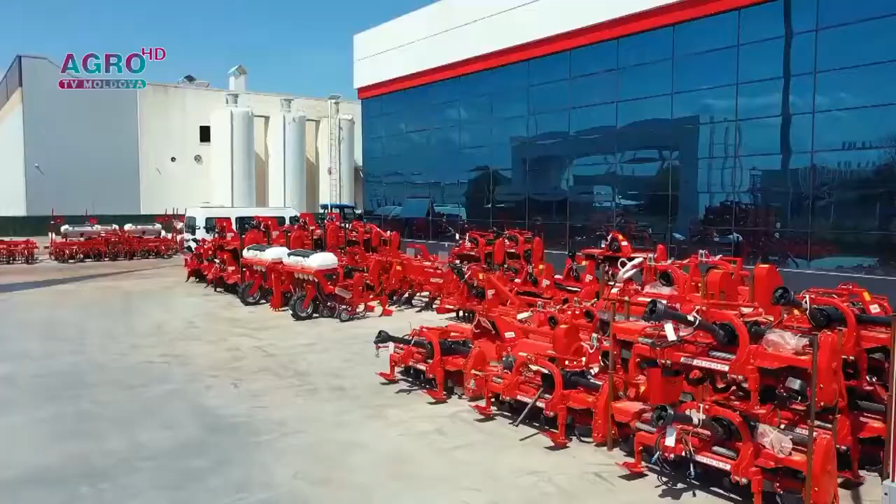Din 1995, Toscano din Turcia produce echipamente agricole avansate pentru prelucrarea solului, mărunțit, însămânțat și plivit. De la bun început, scopul de bază al brandului a fost acela de a oferi acces fermierilor la mașini agricole performante și moderne și de a-i determina să nu mai folosească utilajele tradiționale cu eficiență redusă.

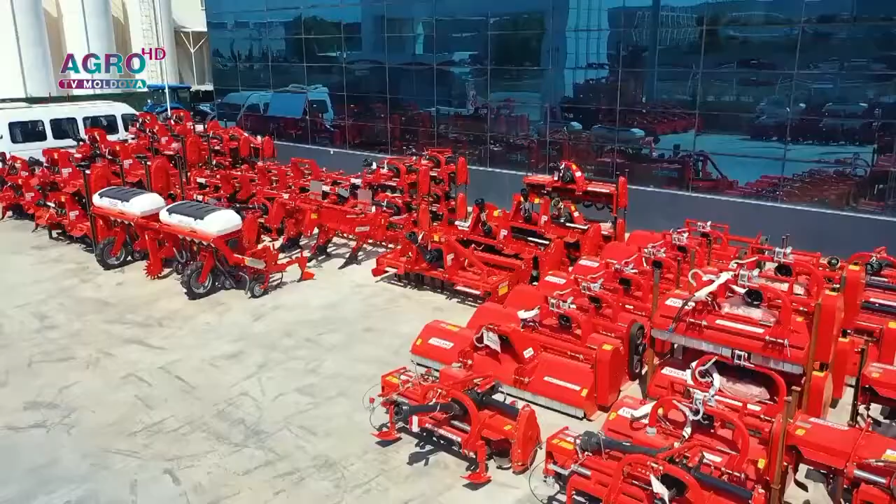Avem onoarea să-l cunoaștem pe fondatorul companiei, domnul Rushen Dündar.

Hello, merhaba, nice to meet you. Nice to meet you. Welcome to Turkey and welcome to my company. Thank you very much. Mr. Dündar, I have had the chance to watch and read some of your interviews, and I have found a lot of information about your success story.

You, being a young mechanical engineer, coming from a farmer's family in your middle 20s, so you had the advantage of coming from a farmer's family, but also being a mechanical engineer. So your father told you, you can be anything, but if you're going to be a farmer, be a well-educated one, and you can also aim to solve problems in this field. Was this your motivation to build such a successful company and to become an inspirational leader?

I take the question, thank you for researching my story. About me, I am very lucky because my family is farmer. It means my business is producing agriculture machinery. This reason, I have experience of what the farmer wants from the producer. Yes, farm agriculture machinery producer. For this reason, first of all, I am near the farmer, I support the farmer. When I produce agricultural machinery, I am thinking how I can make this machinery successful, what we can do to make machinery useful for farmers. I am thinking about all of them.

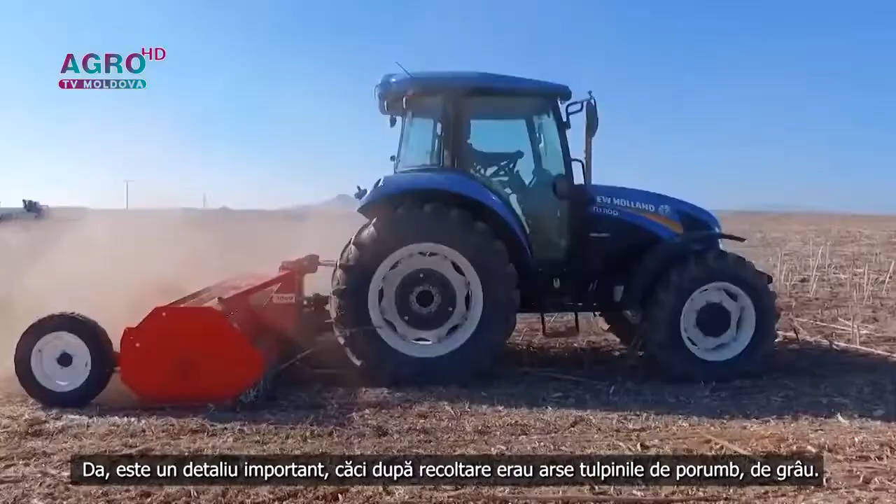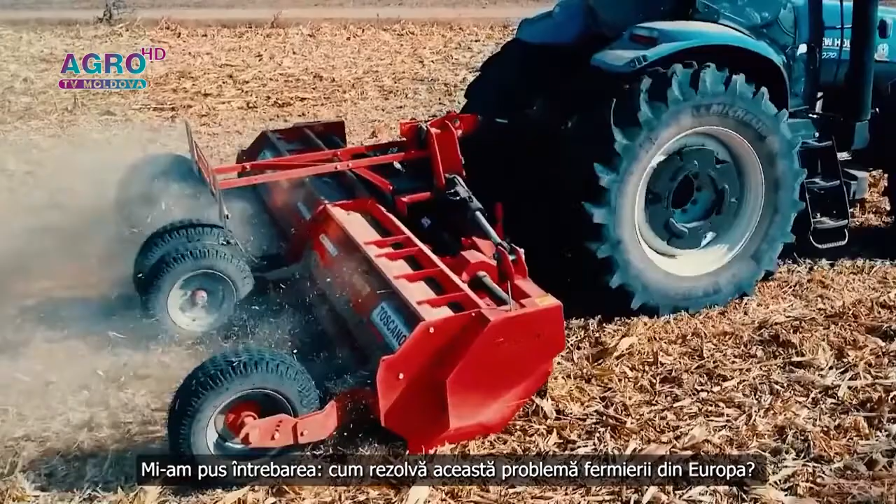First shredder I produced in Turkey. At that time, the Prime Minister celebrated me, some parliament members came to celebrate me. But at that time my company was new, there was a lot of big companies for competition. They bought my machinery and they copied it and started production of my machinery.

Almost 30 years I am producing for European companies. Among these companies there are 3 companies with agricultural products. One of them is named Kuhn. All Kuhn chassis, agricultural machinery chassis, our company is producing, and Kuhn celebrated and invited me to France as one of their best partners. For this reason I have been there.

Secondly, there is Agram. He also invited me. He says to me, I need this machinery, or I need this machinery. All the project is our project, and we are only putting the label Agram and sending it to them. We are giving the guarantee.

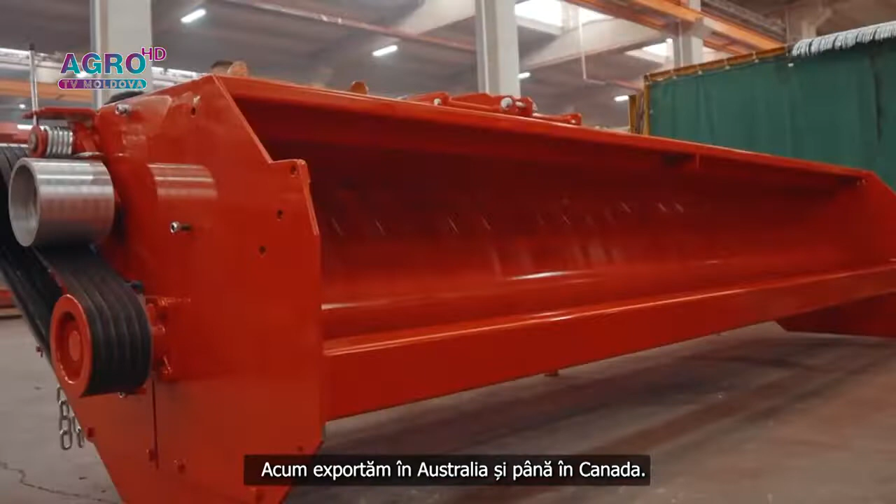Our production is for Claas, Steyr, Massey Ferguson, for New Holland. I worked generally with a big company. Almost 80% of our production we are sending to European companies. You export to more than 40 countries, I think. Now we are sending from Australia to Canada, but it's the first time with a Europe company.

Maybe for countries like France, Australia, Germany, but now it's from Australia to Canada. We are sending, and all distributors' quantity is increasing.

You do have a distributor in Moldova. How many years have you been exporting to Moldova? Yes, I have a distributor, he's selling all my machinery. All Moldova farmers like Toscano machinery. So I think in 5 years we are selling well.

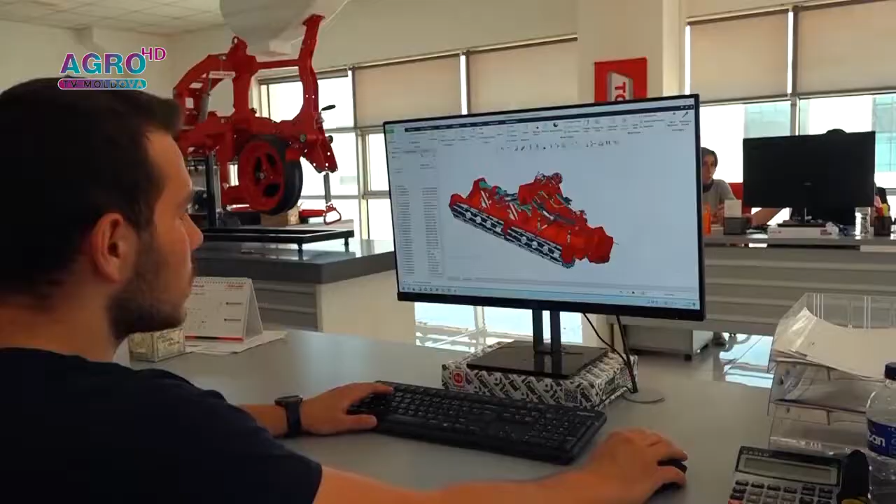So we are in the research and development department of your company. Before agricultural machines are actually manufactured, they have to be tested and set up on a computer right now. What's the first step? First time we are talking about which machinery, how we can do it, which parts we have to design again.

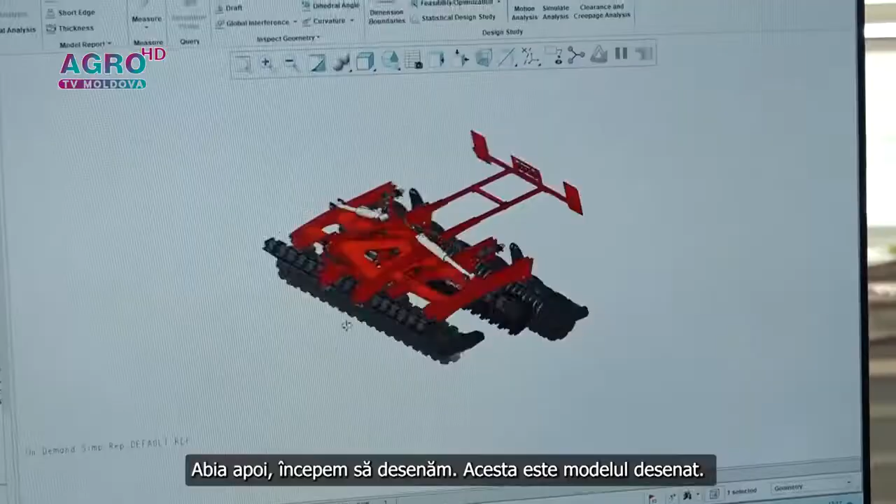After deciding, we are starting drawing. This model is the drawing model. We can see all machinery, all parts, and how it is working in the computer. We are seeing it, but it's not enough for us.

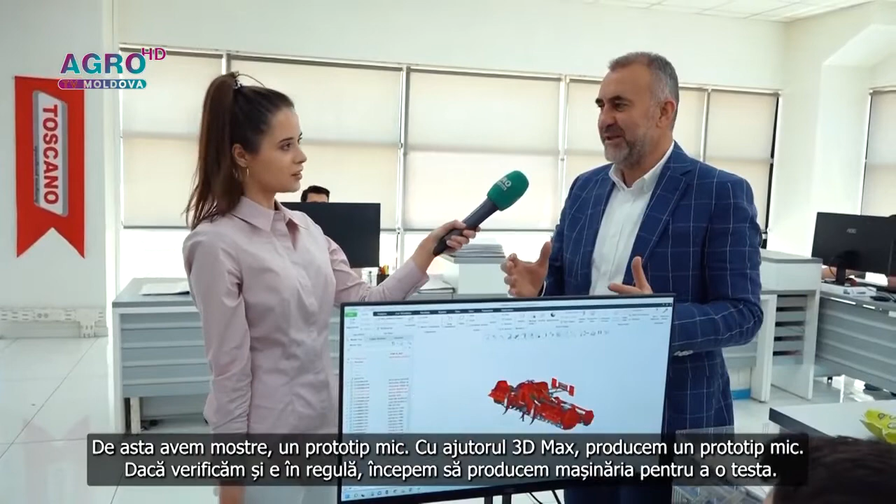This is the reason we are starting a sample or prototype, small. I have a 3D Max. After that, we produce a small one. If we check it and it's okay, we say okay, we start a new one.

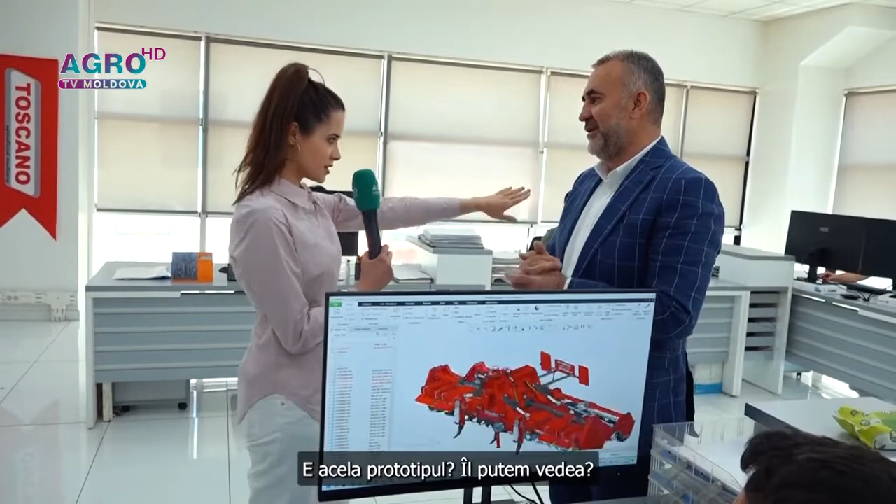One part of machinery for testing. Is that the prototype? Yes, can we see it? In this machinery, it's also the same machinery. You saw it there in the computer.

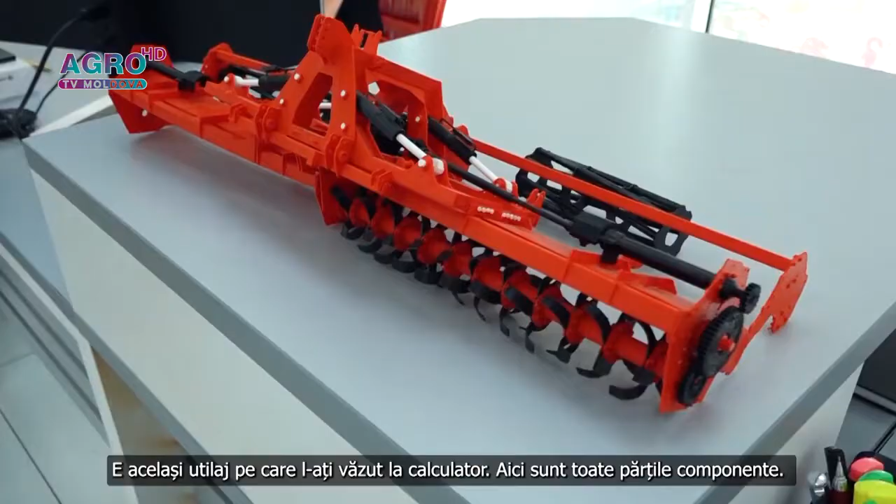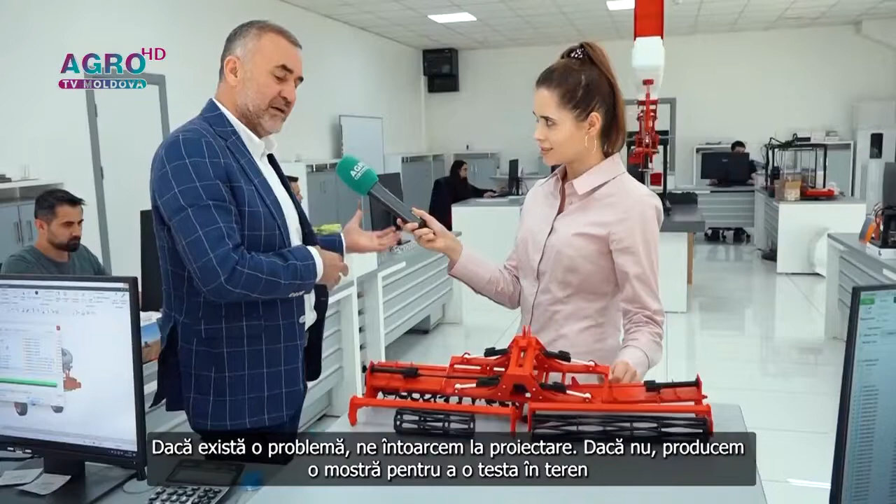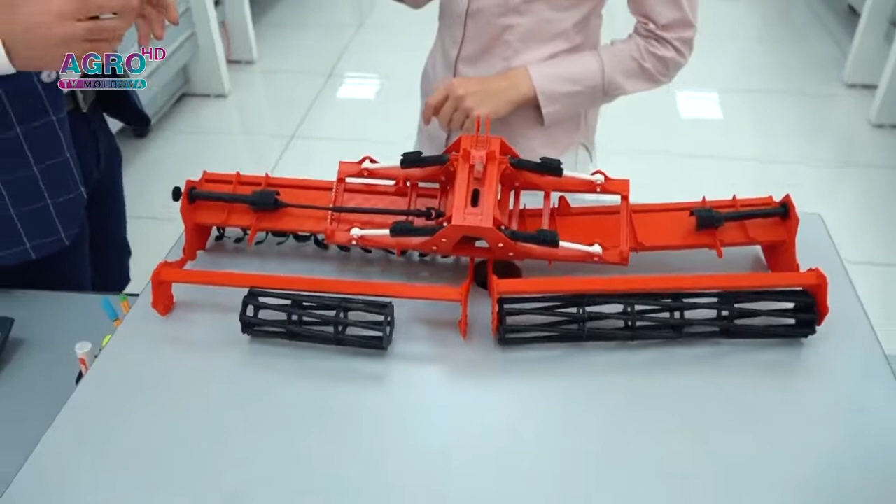After that, this produced machine is the same. Also you can see all parts in assembly, you can do it, you are seeing if there is a problem. Again we are designing. If there is no problem, we produce one sample for testing. In the land we are testing, and if there is no problem, after that we start to sell.

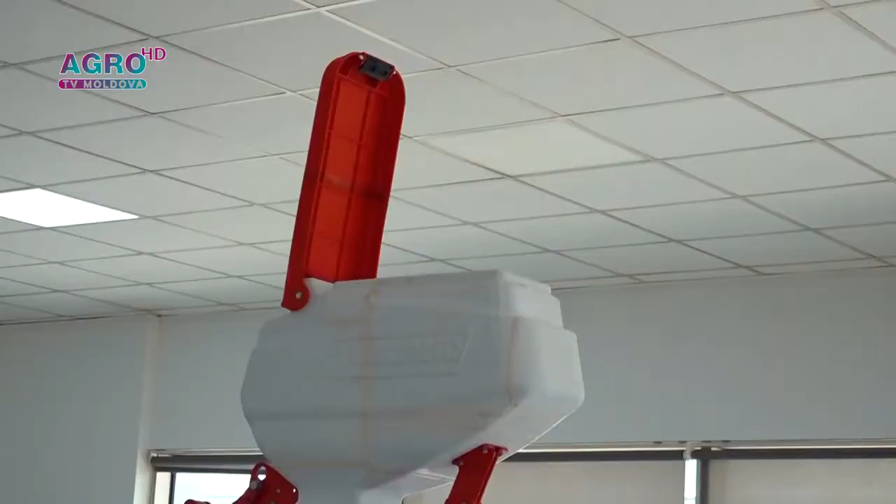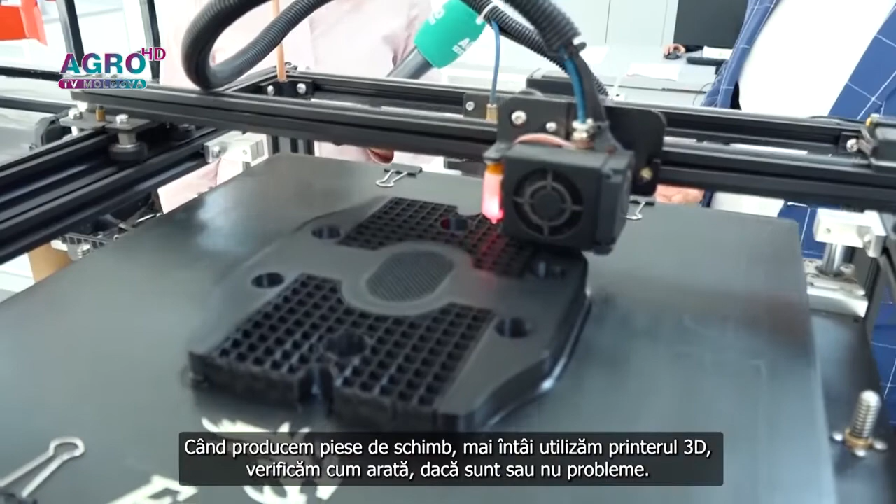And I think you have the 3D printer there. Yes. Shortly we can say, when we produce machinery, all spare parts, first we produce in 3D printers. We are checking how it looks, if there is a problem. After that we produce it in the factory.

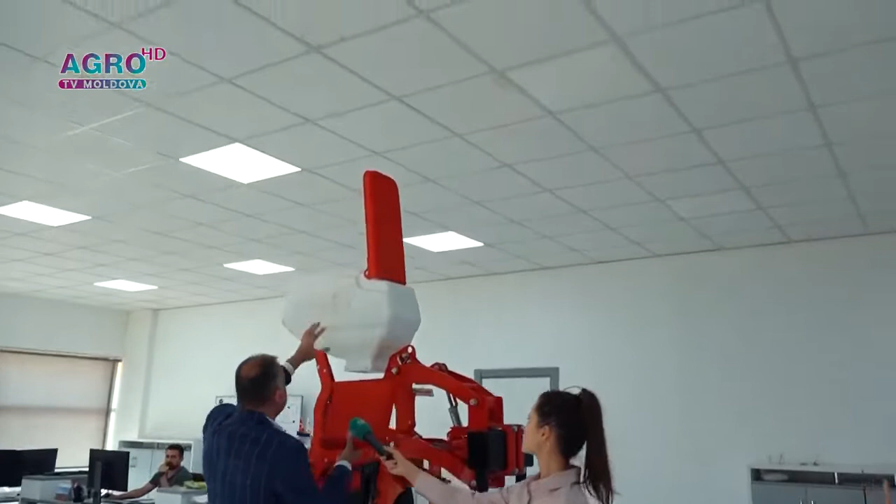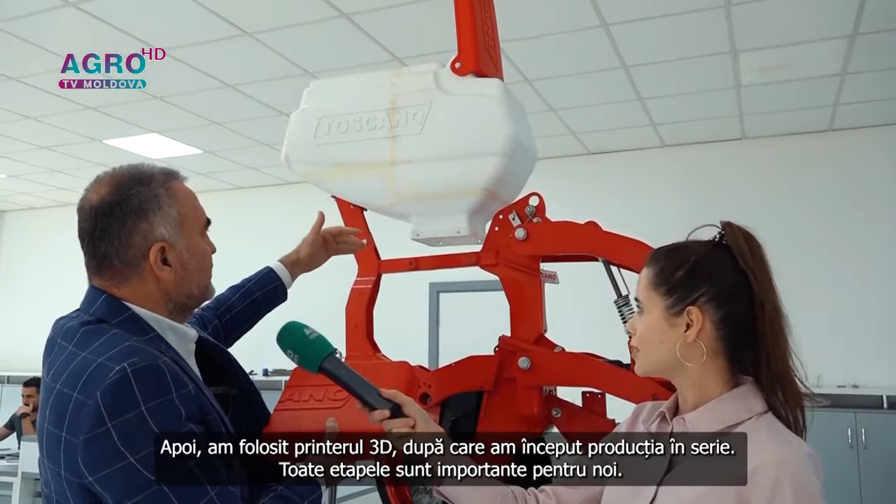I can imagine this came from this. Yes, one, for example, this new seeding box. This one is, for example, this box cover. We made a plan in the computer. After that we produce it on the 3D printer. After, we start serial production. It's important for us.

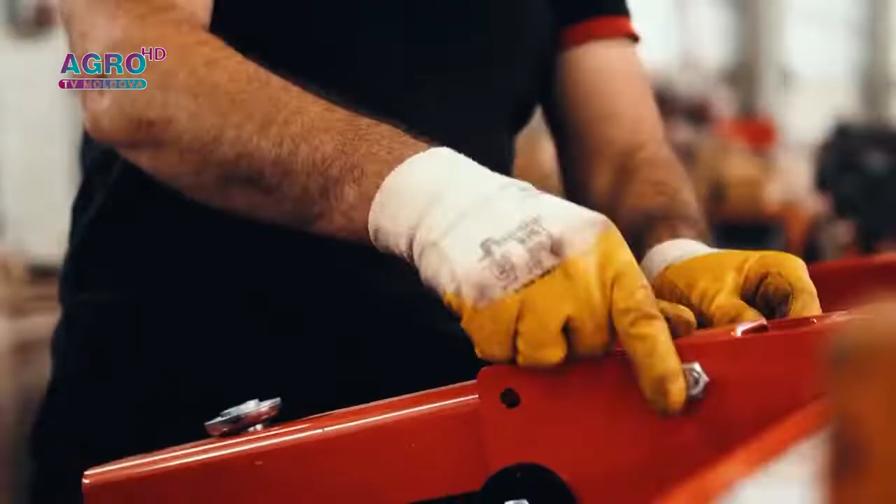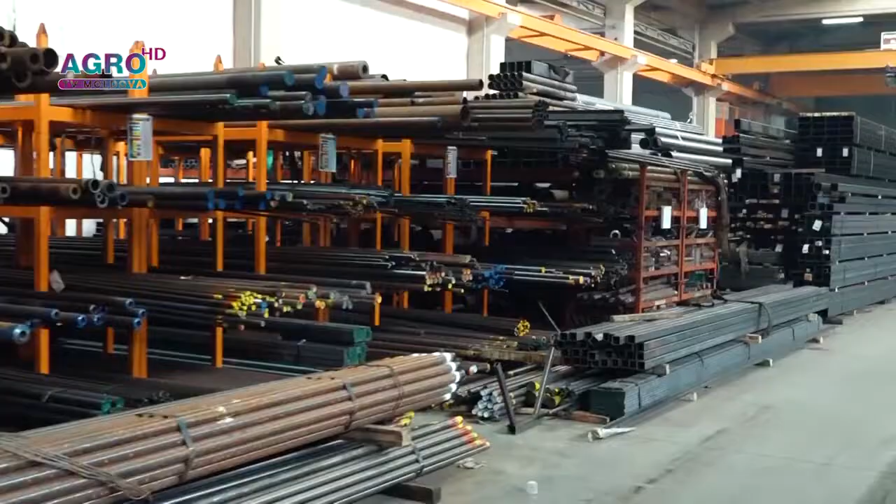We are now in the production part of the factory. It's always nice to see things in action. This is the part where the raw materials come, right? That's right, this is the sheet material stocks. You can see all of the sheet metals that we stock.

I know that right now there is a world crisis of raw materials, how many stocks do you have? Well, it is a very critical point. Currently we have one year's stock to satisfy all of our demand, all of Toscano machinery. That's what our customers, farmers, expect from us, because after that time it may be hard to find raw material. So you have everything you need for the moment? Exactly, we are trying to keep our raw materials, energy as much as inside, because in case of crisis we want to still supply that demand.

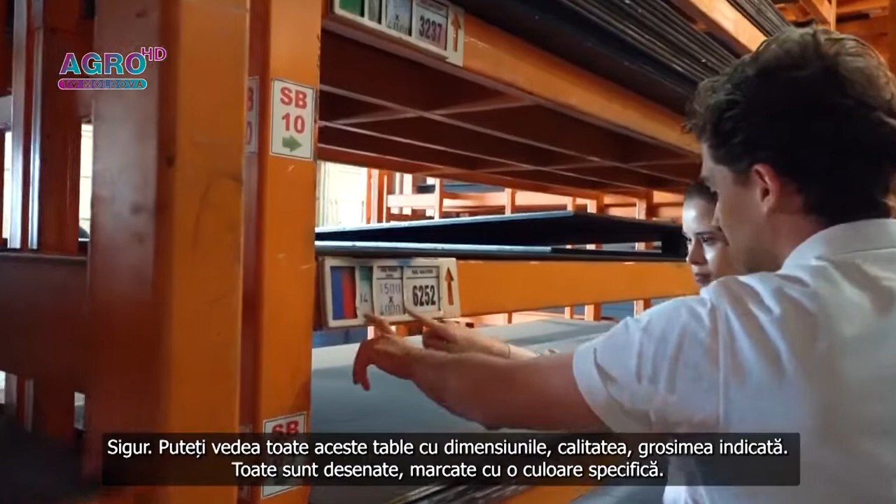Can you tell us more about the way it is stored? Because I see it is very clear. Sure, you can see all of those sheet metals with their dimensions, with their quality, and with their thickness. All of those sheet materials are painted with their colors, and you can see their quality, their dimension, and that's how we manage our planning operations.

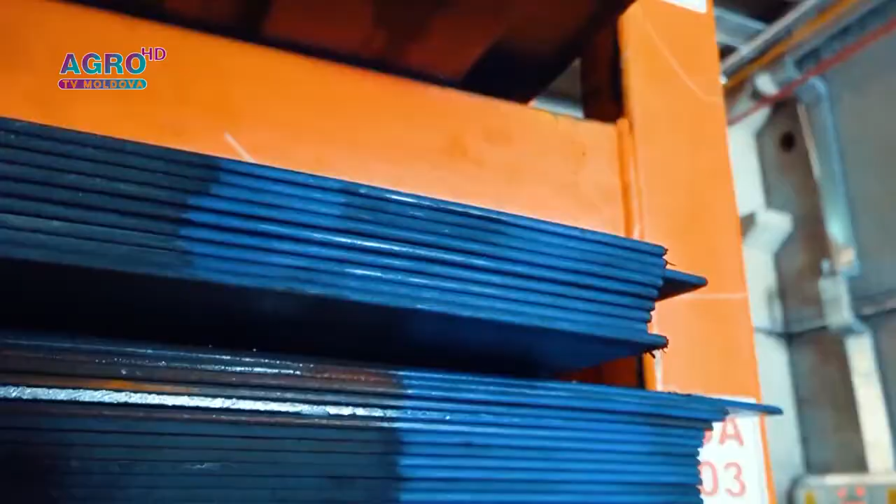In the CNC laser cutting area, Mehmet explains this is where production starts. Sheet metals from another area come here, and there are 4 laser cutting machines. Up to 2 centimeters thickness, they use these laser cutters.

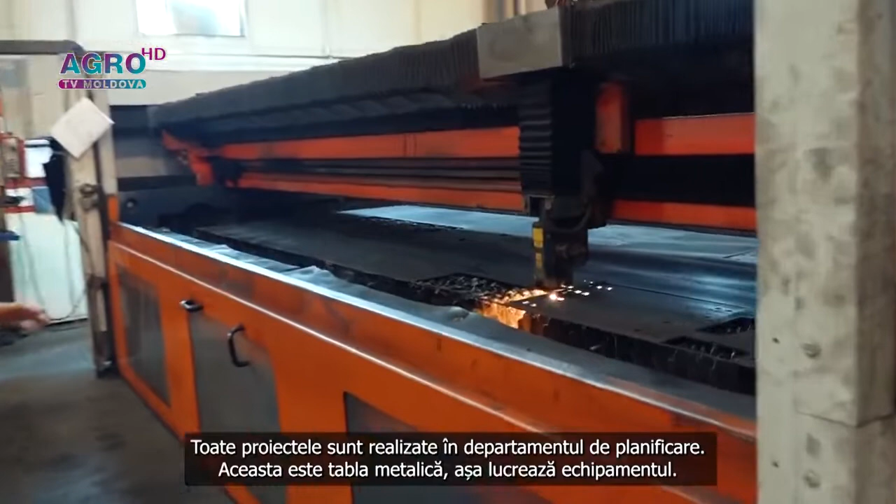All projects are planned in the planning department, and that's the sheet metal we've seen before. That's how the laser cutting machines do their work.

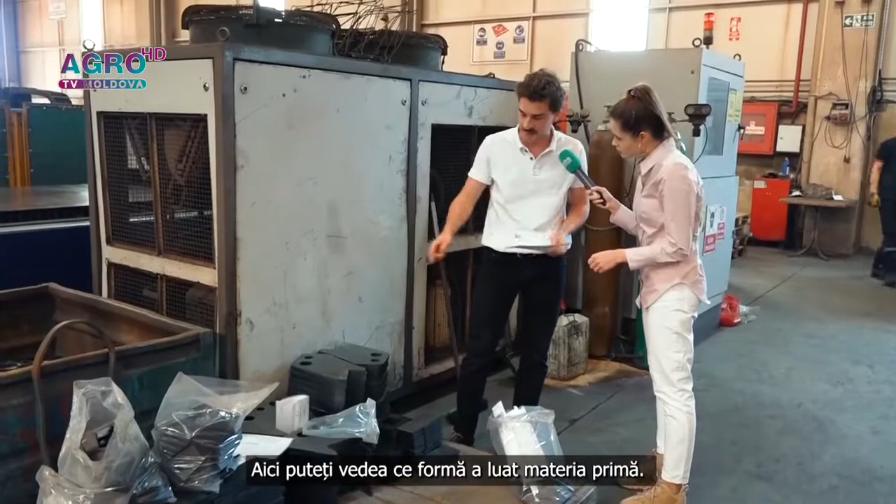After here, I'll show you what it does. You're seeing the raw materials get their shape. For example, this piece is probably 1 centimeter thick, and it's still a bit hot from just coming out of the laser. Its workflow is written here - for example, this one will go to bending after this process. That's how we manage and follow our production and planning processes.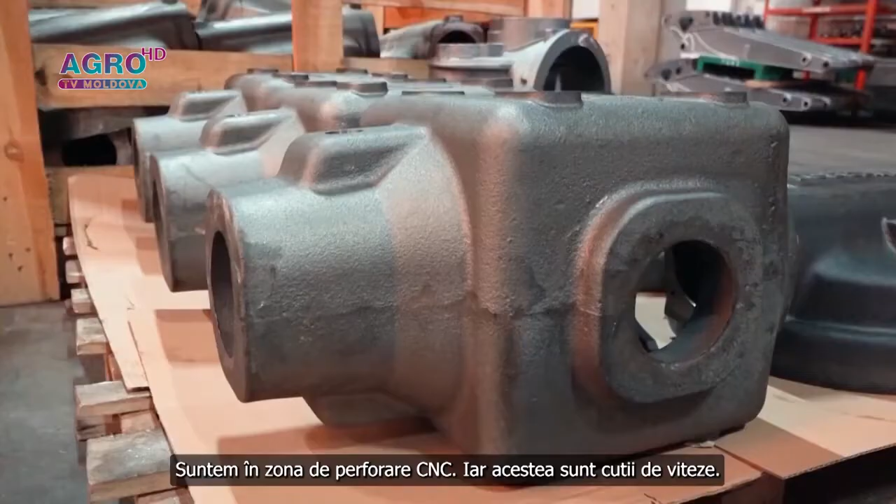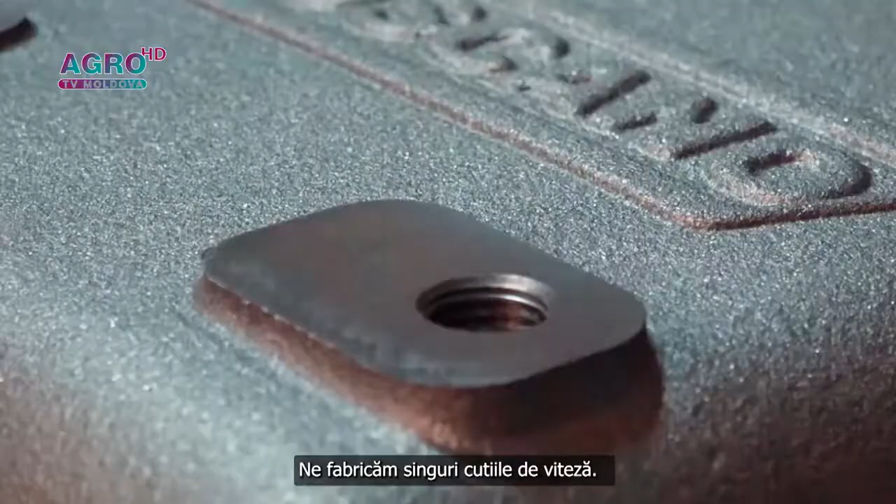We are in the CNC drilling area, and these are Toscano gearboxes, used in power harrows. You can see the Toscano label on them, and we make the drills with this CNC drilling machine. After here, you'll see all of the drilling operations and all of the drilling machines.

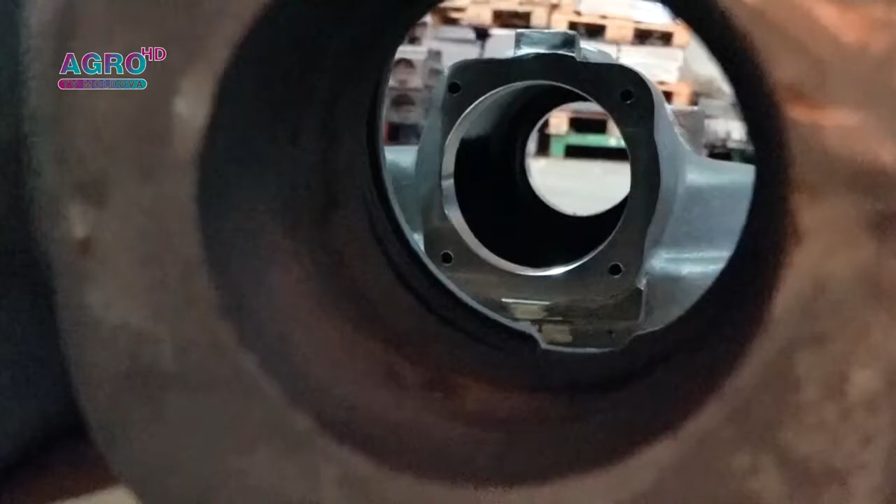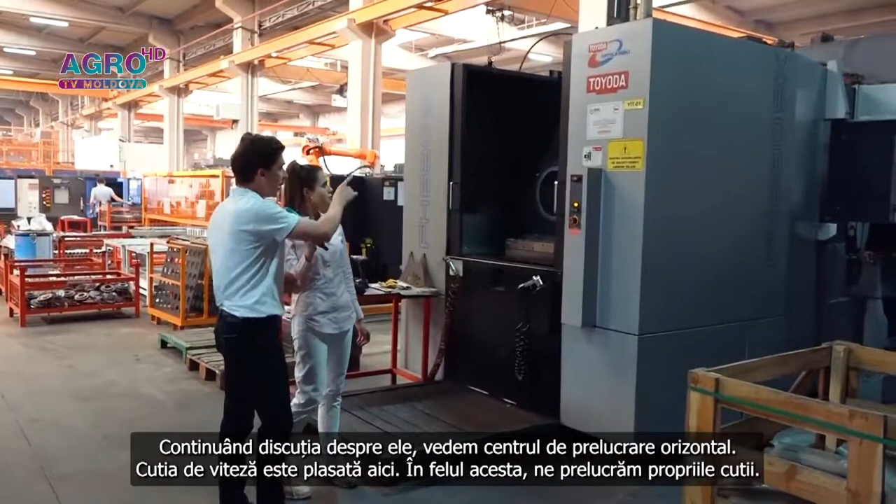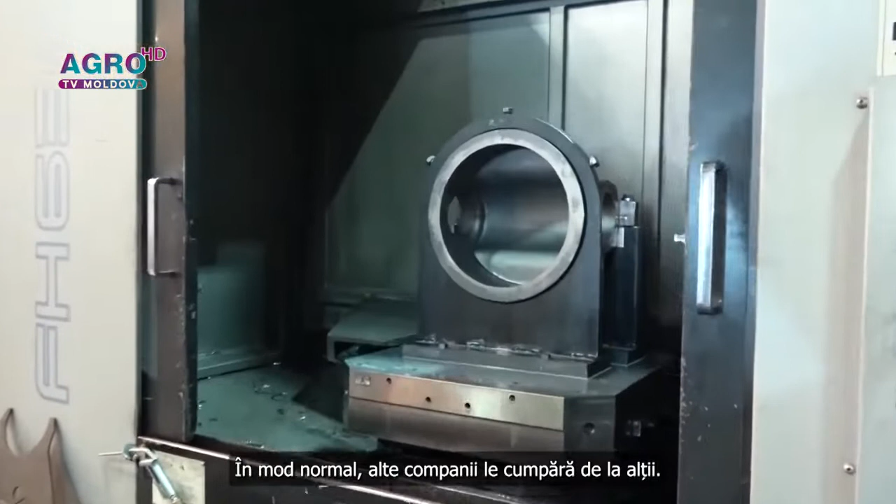We mentioned the Toscano gearboxes - here is the horizontal machining center where the Toscano gearbox is placed. That's how we process our own gearboxes. Normally other companies would buy gearboxes from somewhere else, but we make our own because we cannot trust other suppliers.

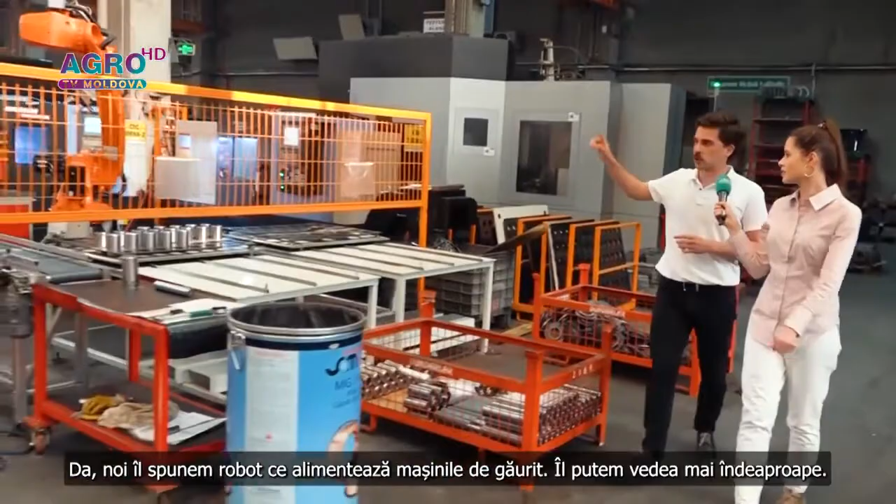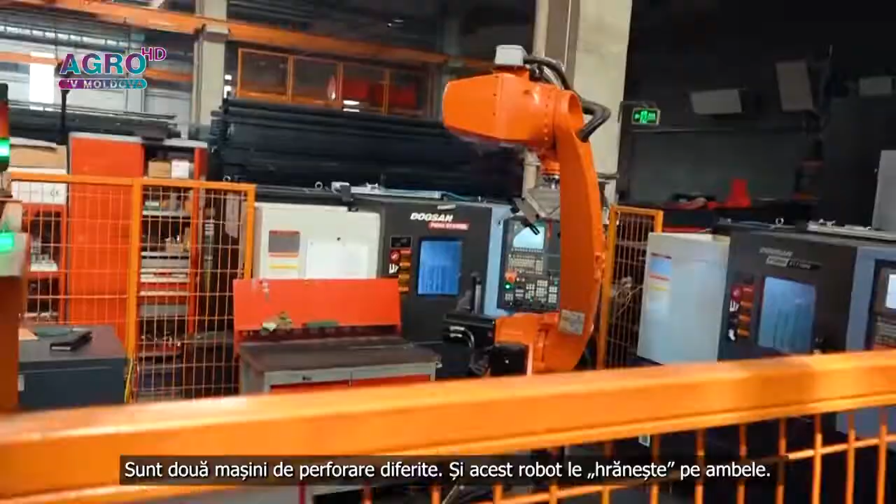After the horizontal machining center, we'll see the CNC drilling machines. This is a feeding robot for the CNC drilling machines. There are 2 different CNC drilling machines, and this robot feeds both of them.

This specific robot, thinking about 3 different shifts, does the job of 6 men at one time.

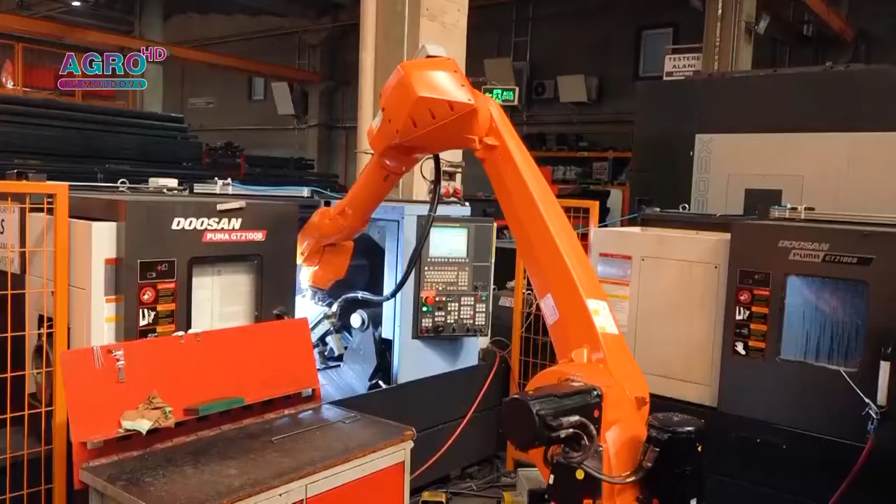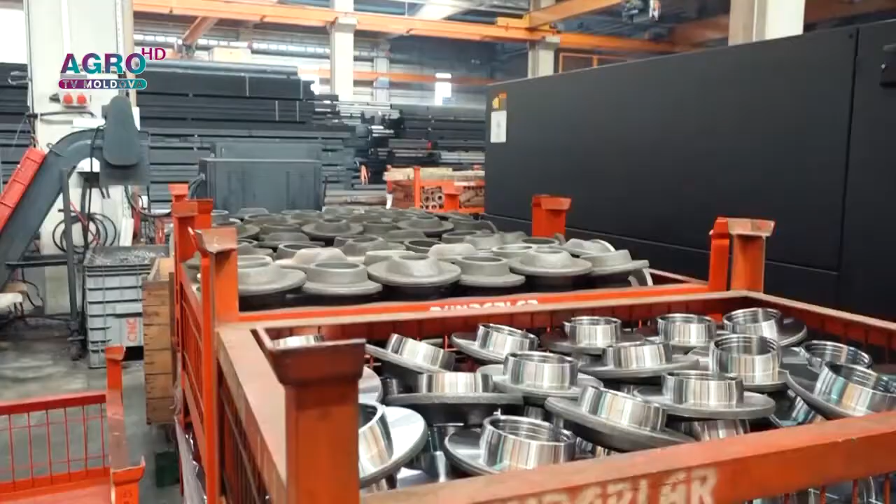You have your own materials to produce your spare parts, right? Yes, we see Toscano spare parts around us in the CNC drilling area. We produce almost all of our spare parts ourselves, trying to cover all spare parts requests in-house at the Toscano facility. This is a great advantage over other companies because quality is the most important thing.

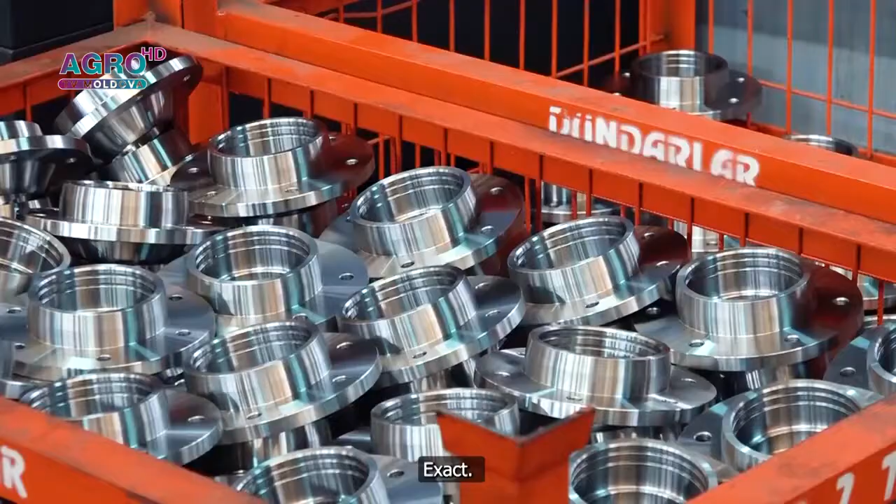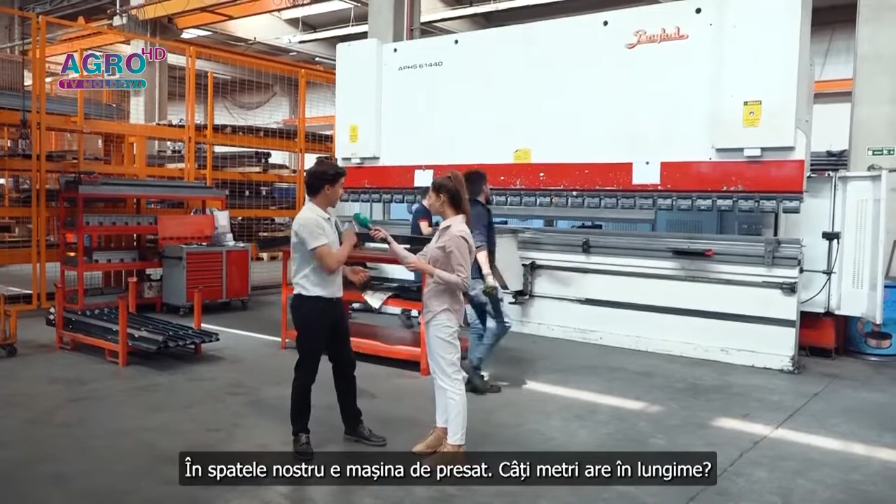Behind us we have a pressing machine - it's a 6 meter long abkant press. After the laser process, we bend our processed sheet metals in this machine. We also have 4 meter, 3 meter, and 2 meter presses.

This is the biggest, largest one, so it's really easy to work with. Yes, it's very easy to process. For example, back covers of rotavators are processed in this machine.

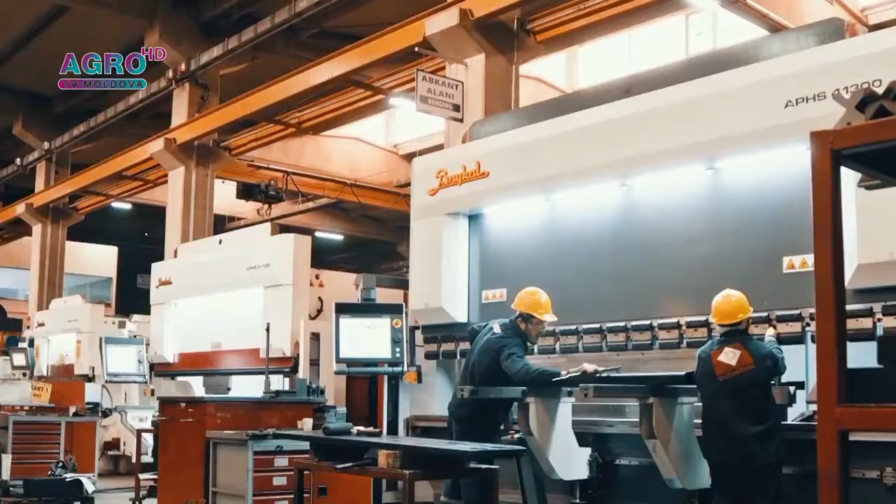After all the parts are produced, they all go to storage - this is the Toscano storage area, almost 5,000 square meters. I'll show you how we store Toscano products so it's very easy to find them. There are maybe millions of different parts, so we have to store them very carefully.

We use a Kanban label system with the first-in, first-out principle. When we scan this code, we can see how many parts we have, how many are on order, and how many are in supply - all of those details. This is a must in a company like Toscano.

We have 5 different shelves stacked above each other, so we try to use the area in the most efficient way - we use our roof, even our roof, for storage.

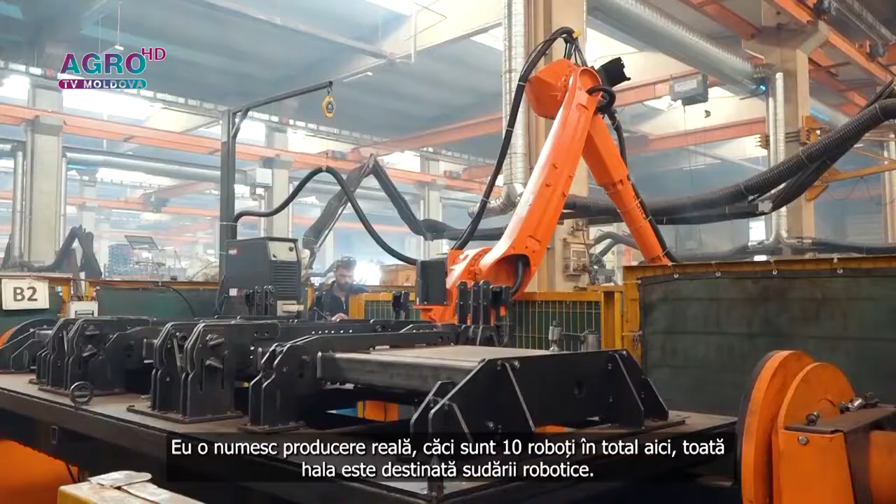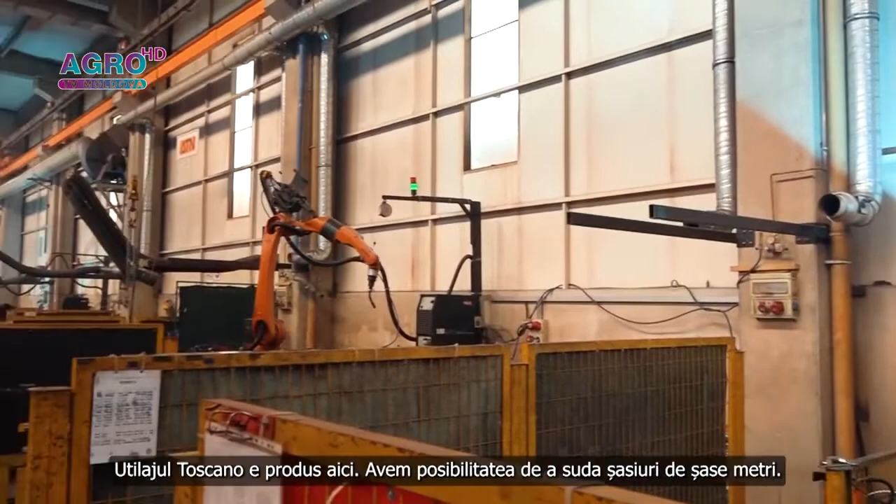Another part of the factory with a lot of action is the robotic welding area. It gives you excitement - I call it real production because there is welding, with a total of 10 welding robots here. This whole hall belongs to robotic welding, where all Toscano machinery is produced. For example, we have the ability to weld chassis up to 6 meters in these robotic welders.

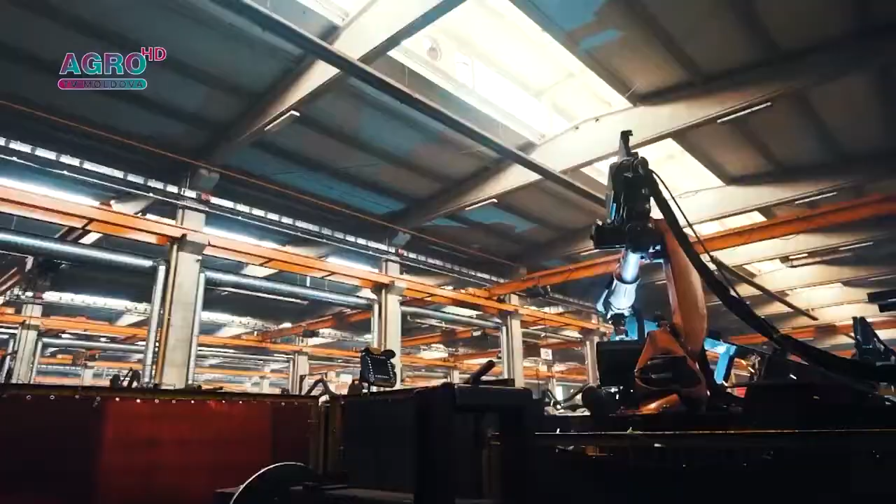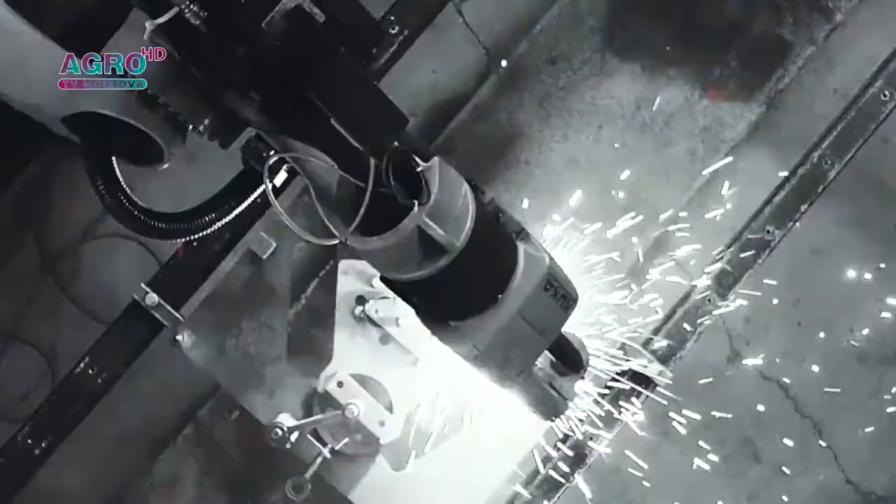We are seeing the agricultural machinery's whole body here, being welded. You can take a closer look, but be careful - it is the rotavator's main body, the rotavator chassis.

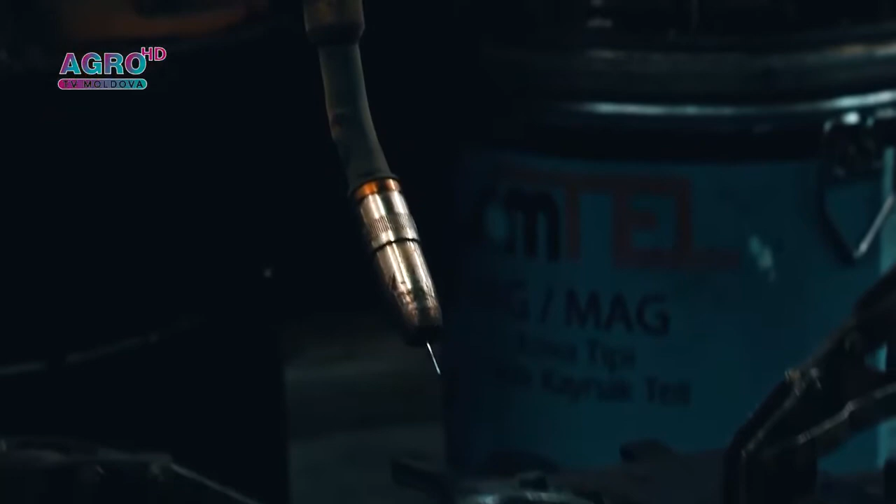Why is this robot so important, with its multifunction ability? It's important because you totally avoid human error, and it can work 24 hours a day, 7 days a week, so production never stops - it always welds. That's why it's important.

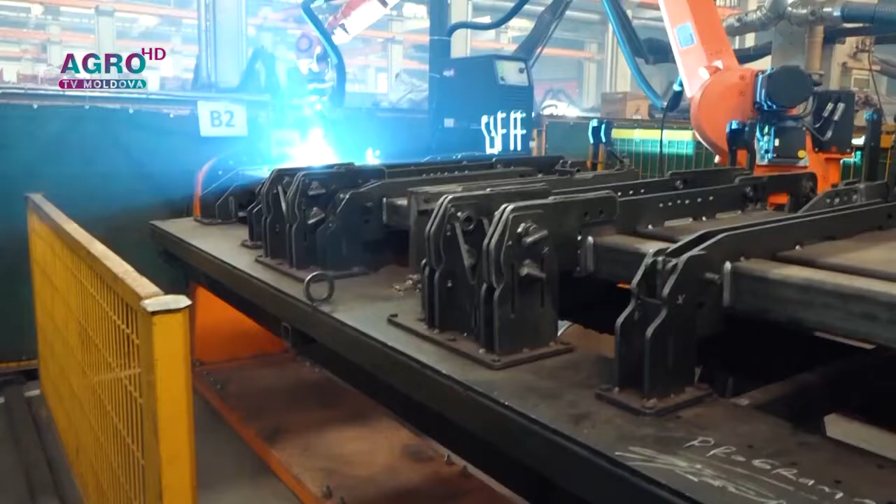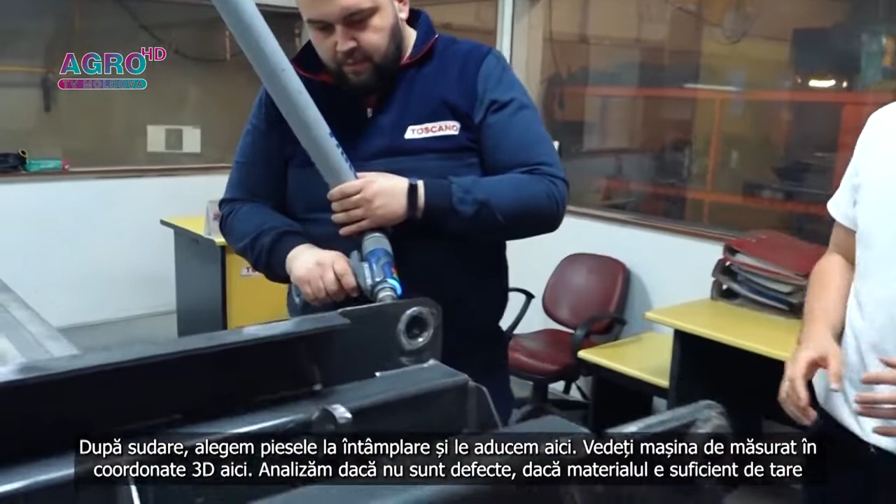After welding, we're doing quality check. We are in the 3D measurement center, and after welding, we pick our products randomly and put them here. You are seeing the 3D measurement machine here.

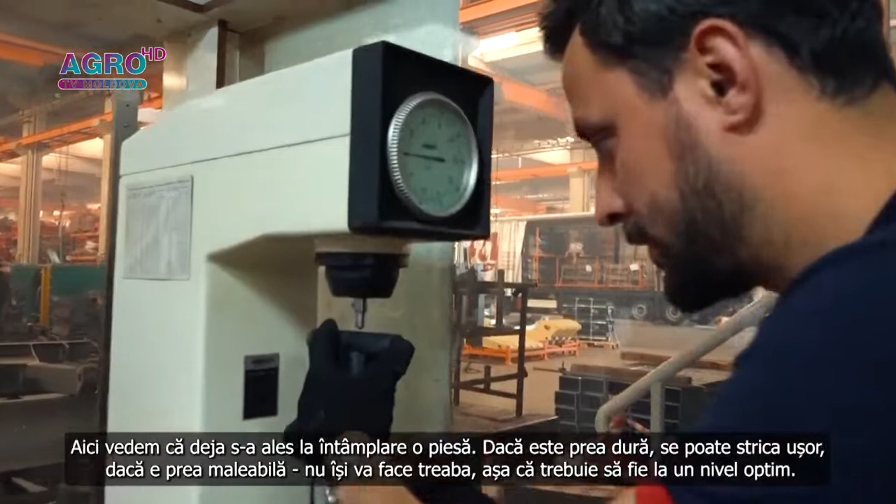Over there, we analyze and measure the material's hardness. We already picked a part randomly, and we analyze its hardness, if it's okay, if it's hard enough. If it's too hard, it can break easily. If it's too loose, it won't do its job, so it has to be in balance.

So if something is wrong, you always redo it. Yes, exactly, that's how we do it. That's why we give importance to quality.

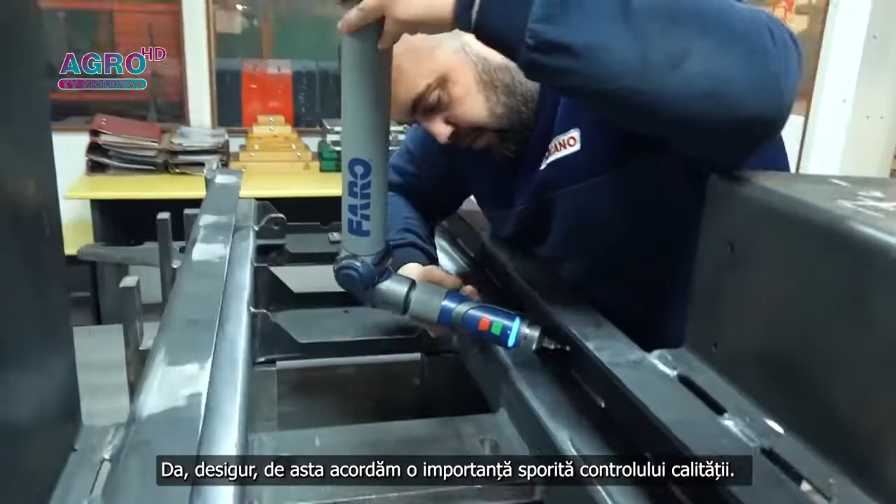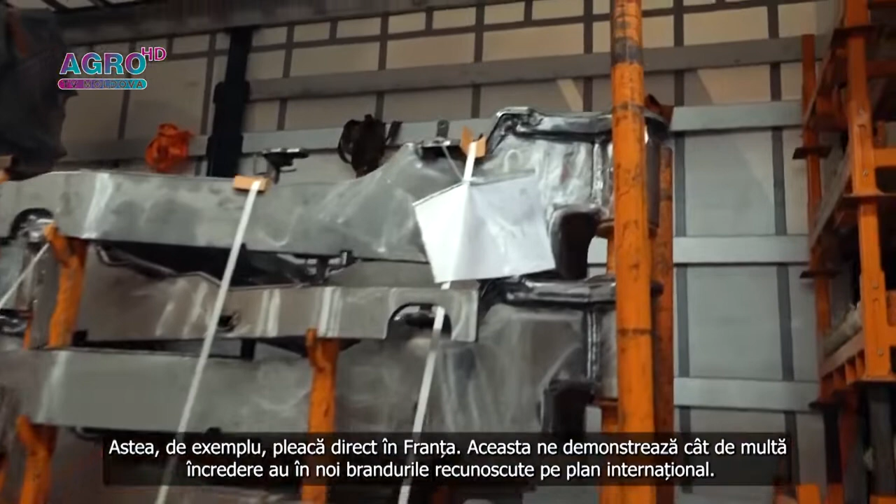You send to Europe not only Toscano, but also supply your partners with spare parts, right? Yes, exactly. We are producing agricultural and construction machinery products for Kuhn, Gupil, Yanmar companies, and those go directly to France. This is proof of worldwide known brands trusting us, trusting Toscano. Those are not Toscano productions, those are for Yanmar, Kuhn, Gupil, ATN, and go directly to those brands.

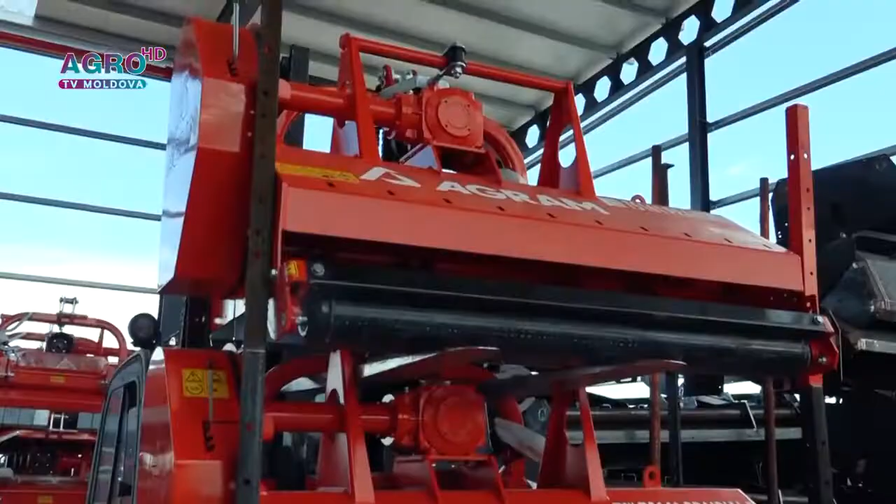This is production for the French brand Agram. Beside the Toscano brand, we produce for other manufacturers. Those are the end products for Agram company. We also have allowance to produce under the Toscano brand, so what you buy from Agram is totally the same as what you buy from Toscano. This is evidence that your partners really trust you and your quality. Exactly, that's proof of their trust.

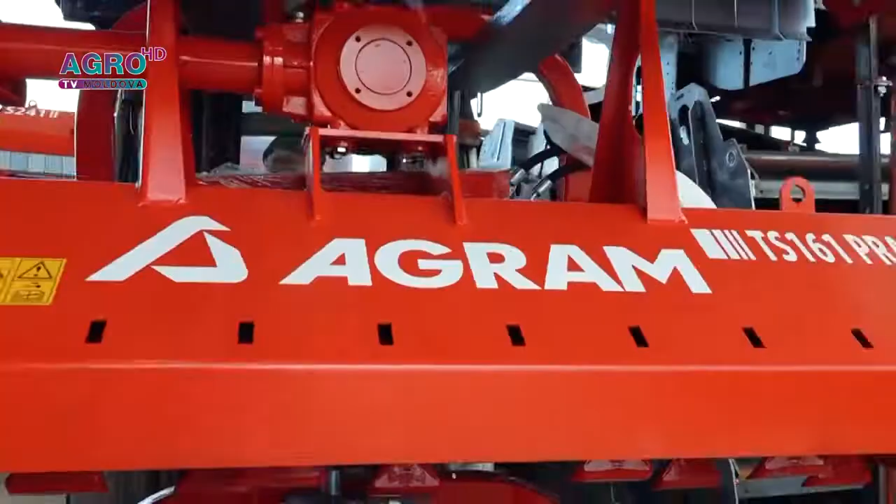Now we are in the automatic powder painting area. All of the material is painted in this area, in this box. You will see other details later. First, the part gets into the box. It washes, it dries, it paints, it dries again. So all of that work is done in this box. All we do is just hang the product, and that's it.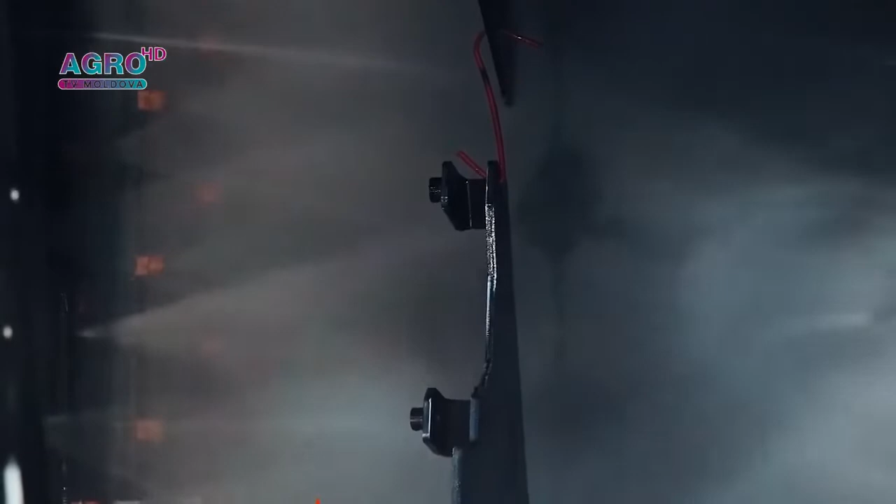Then it goes to the assembly line. So this is before the assembly line. Now I will introduce you to my younger brother, Ahmet.

So you're not alone in this. Yes, I'm not alone, there are two more younger guys coming to the factory. He's in university, Boğaziçi University right now, the best one in Turkey. So we will meet him.

Hello, nice to meet you, Michaela. I heard you're studying international trade. Yeah, exactly, I'm in 3rd grade. Next year I will graduate from Boğaziçi University. So after your graduation, are you planning to come to Toscano? Yeah, exactly, I'm excited about that and I'm working hard for it. I'm planning to focus on the export and import part of the company.

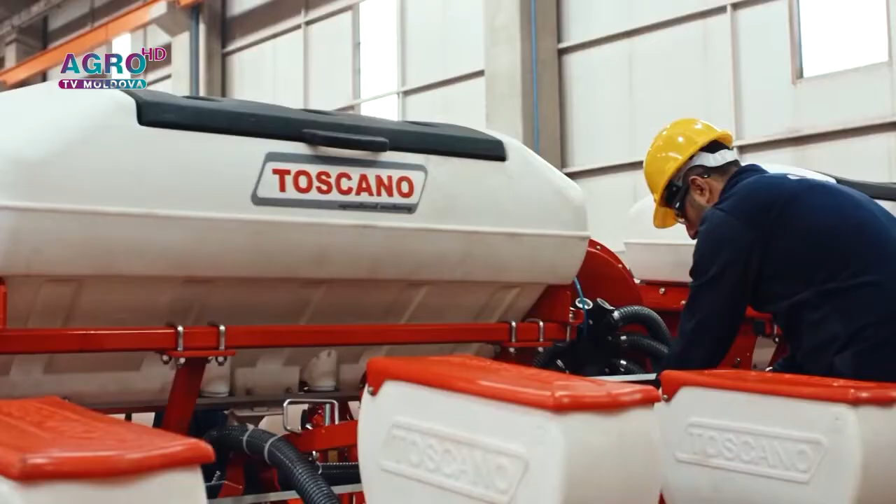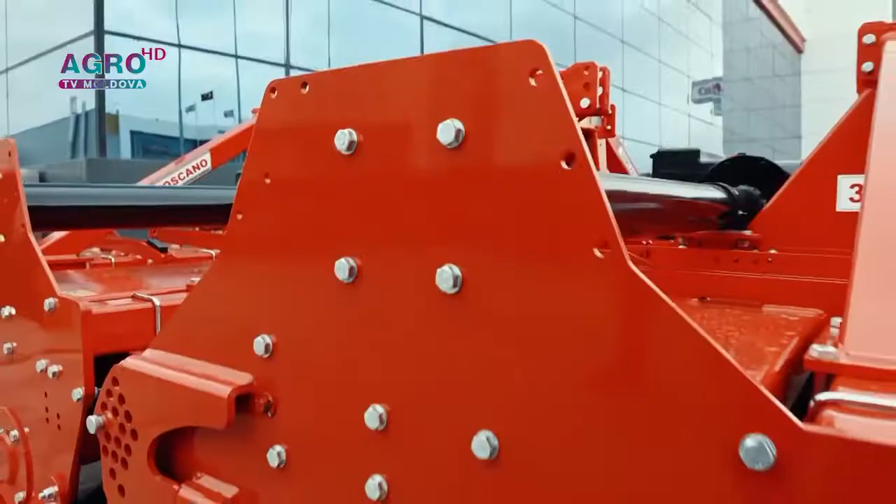After we see all the steps of production, we get to see the end product too, the agricultural machinery itself. I'm here with the two brothers, and I think these machines are going to Moldova, right? That's right. You have seen all the steps of production, and now you're seeing end products which go to Moldova. We can check the products.

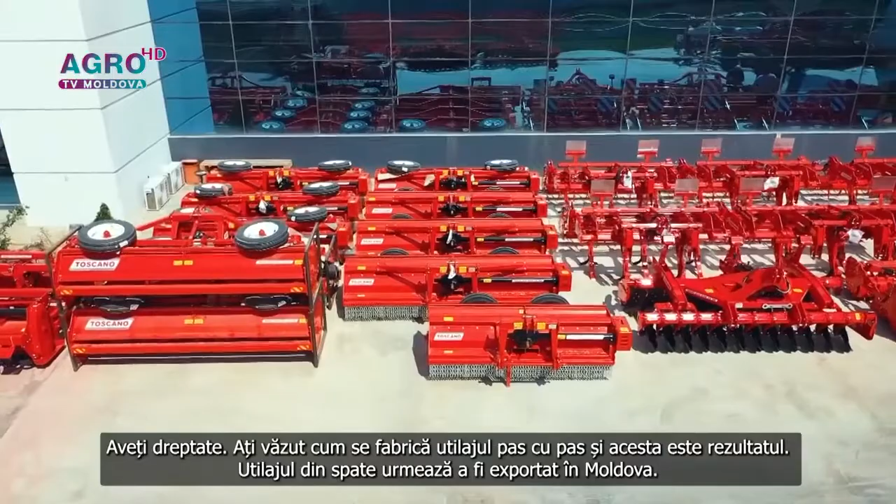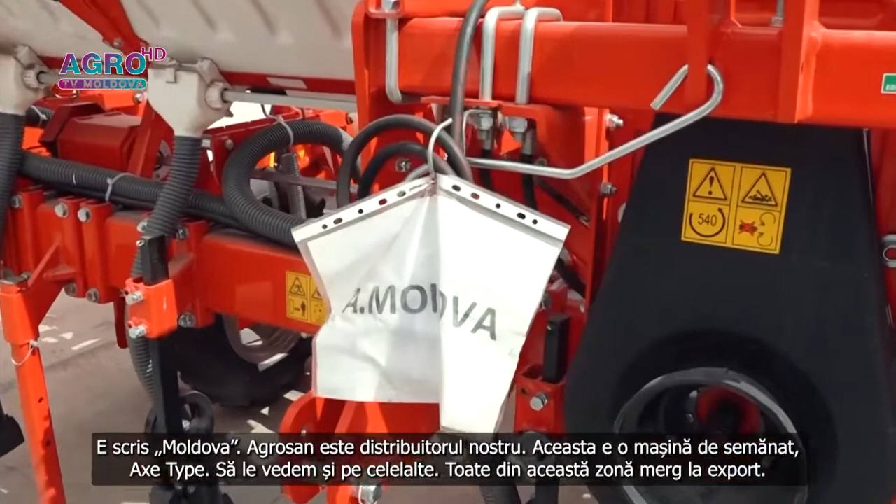Yes, please. It's written, for example, Moldova Agrosan Moldova product. It is a seeding machine, Axe type. Let's see other machines. All of the machines in this area go to foreign countries, export machines.

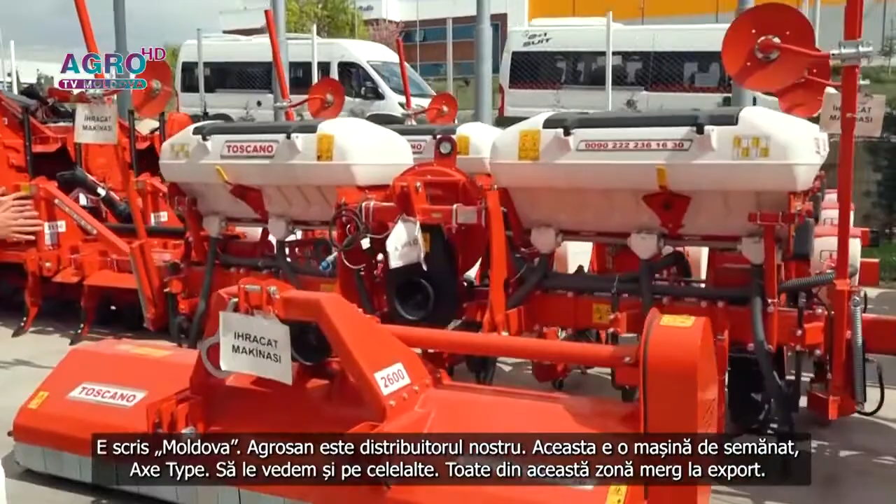We send one truck every day, also to Moldova, thanks to Ivan. All of those stocks are ready to ship to foreign countries.

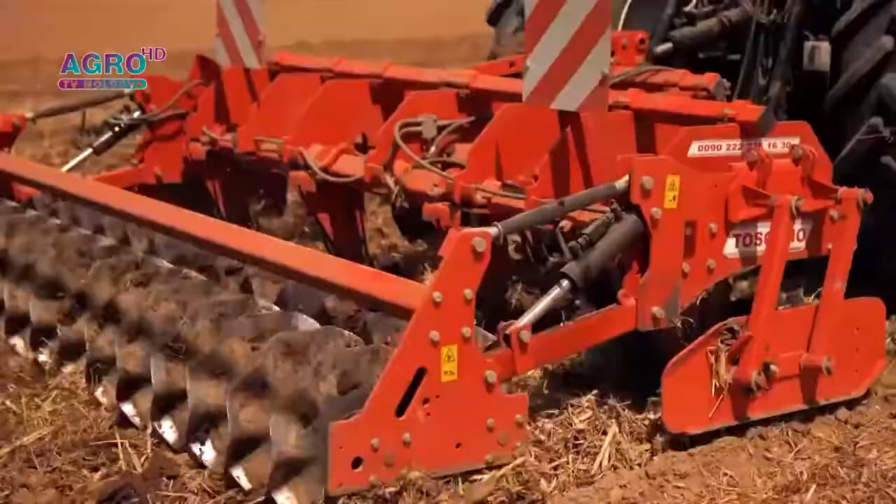Well, we couldn't miss the chance to see the equipment in working conditions. Here we have the disc harrow, right? I heard it's one of the most popular products on the Moldovan market. Yes, that's right, Mr. Ivan always buys this. Mr. Ivan, your distributor? Yeah, my distributor, Agrosan. He always orders that one with the same optionals, and we also use it on our own land, Toscano land.

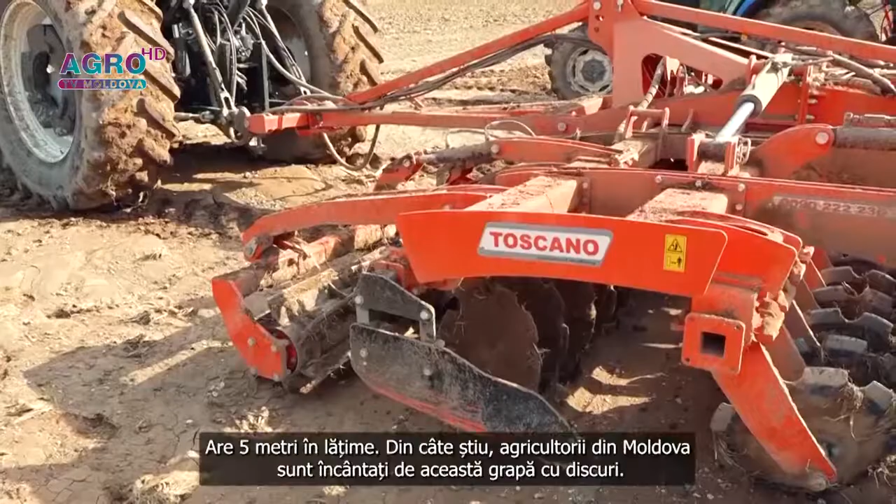We can check the machine if you like. Yes, please. It has 40 discs, it has a chopper. It's 5 meters currently, and it's a trailed version. As far as I know, Moldovan farmers love it. It has fertilizer tanks. We also send those machines directly to Moldova.

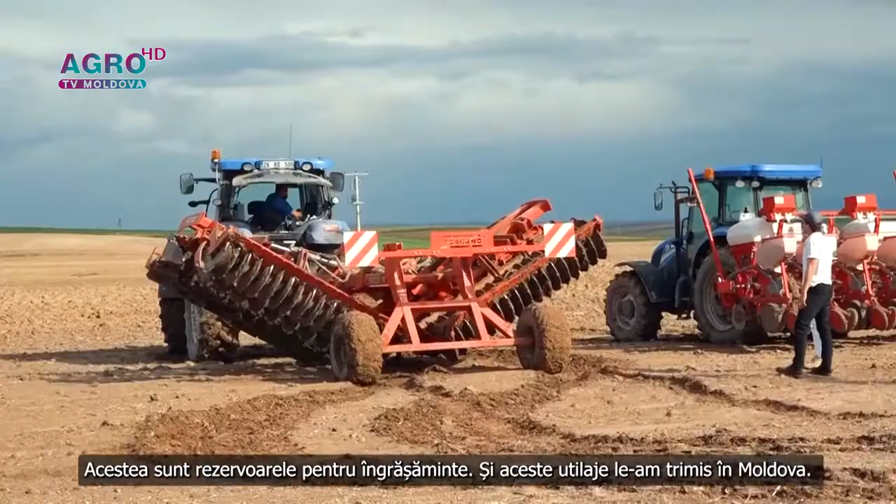Thank you very much for coming. You are in Toscano fields right now. We are trying our Toscano machinery in our own fields to make upgrades. Thank you very much for coming here to see Toscano machinery. Thank you very much. How large are your fields? It's around 300 hectares, which makes 3,000 decars.

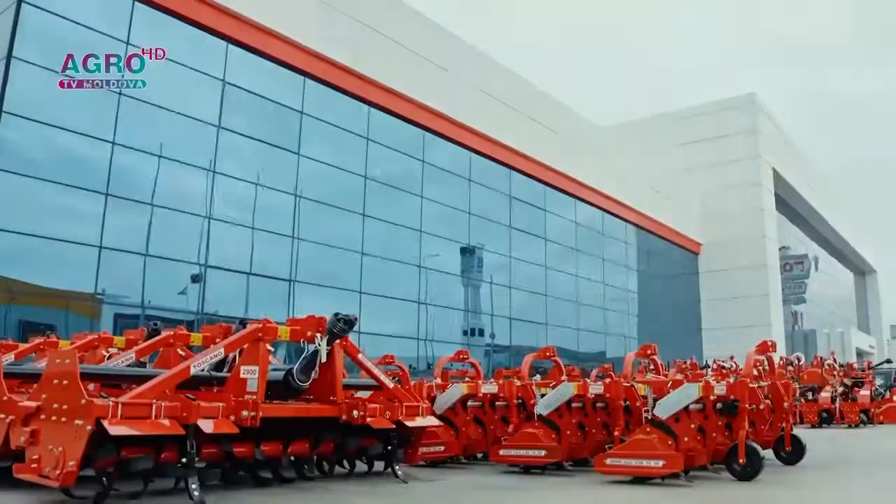Thank you very much for the tour, for having us here in your company, for opening your doors for us. Thank you too for coming to Toscano. I am saying hello to everybody, all the farmers. Thank you for coming again.